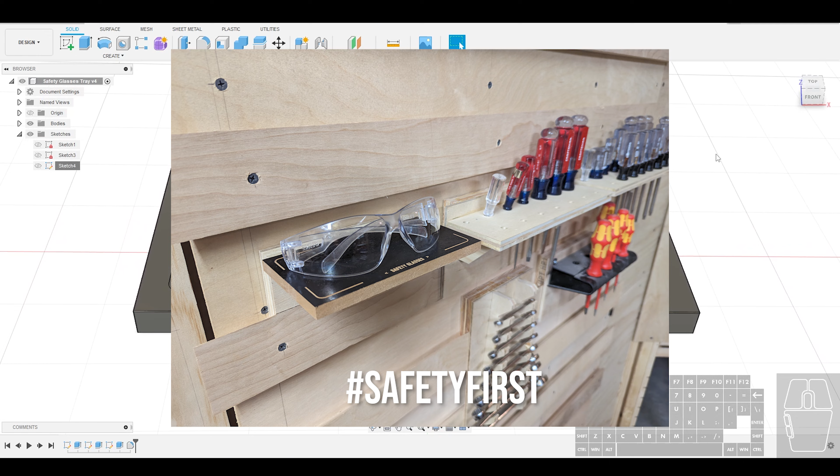All right, so I am going to delete all of this out of my file, and we are going to get started. Walking through the steps, the first thing we need to do when creating a V-carve is setting up our file.

There are two things I want you to pay attention to. Number one is the document settings. I'm going to be working in inches for this particular project, so make sure your document is also set to inches so you can follow along.

The next thing we need to do is set the direction of our primary axes, meaning the direction of our X, Y, and Z axes. Come up here and go to your preferences, and under the general tab, set your default modeling orientation to Z up.

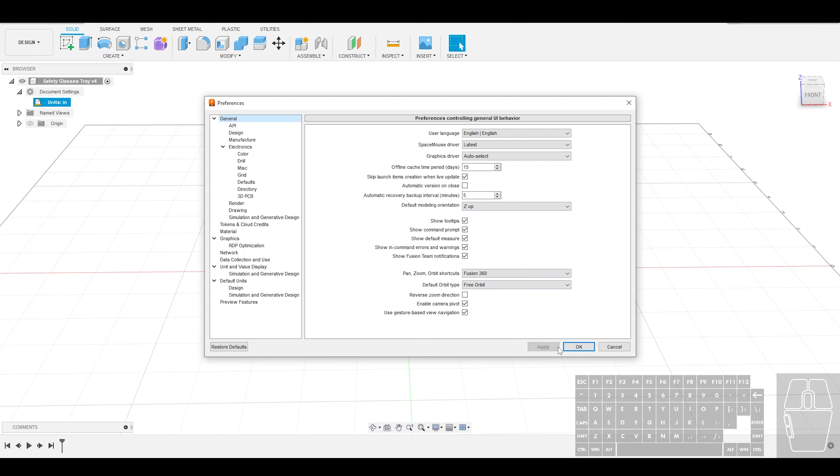That is the way that winners do it.

Now, why do we do that? Number one, I think that's a more common modeling method—if you use Blender or SolidWorks, that's how it's oriented. I also think it makes the most sense for CNCing, because on my CNC machine the Z axis is up and down, and the X and Y axes are forward/back and left/right. So we want to make sure all of that lines up.

Step one complete, document is set up. The next thing we need to do is create a workpiece—essentially the finished dimensions of your final piece, in a rectangle.

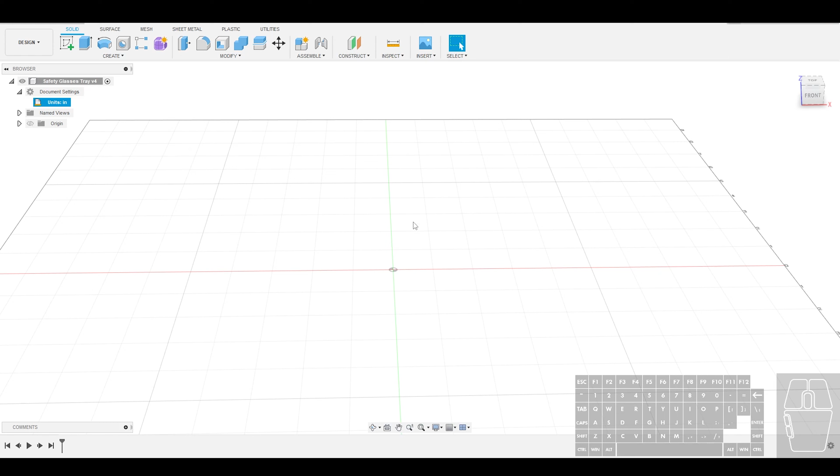So I'm going to create a sketch and put that sketch on the top plane. Next, I'll create that workpiece by making a rectangle. I'll use a center point rectangle and put that center point right on the origin, then drag out. Now I'll define my dimensions very quickly.

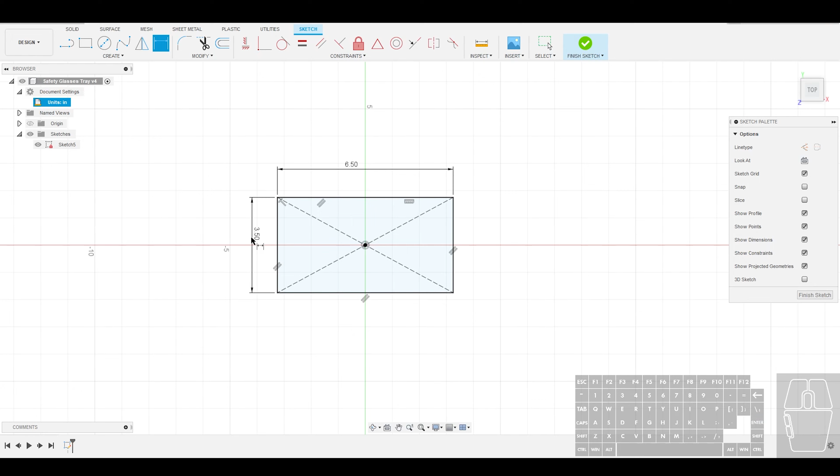For this piece, we are going to use dimensions that are 6.5 inches wide and 3.5 inches tall. One thing I want to make clear is that this bounding box should not be the raw dimensions of your wood, but the finished dimensions of your final piece.

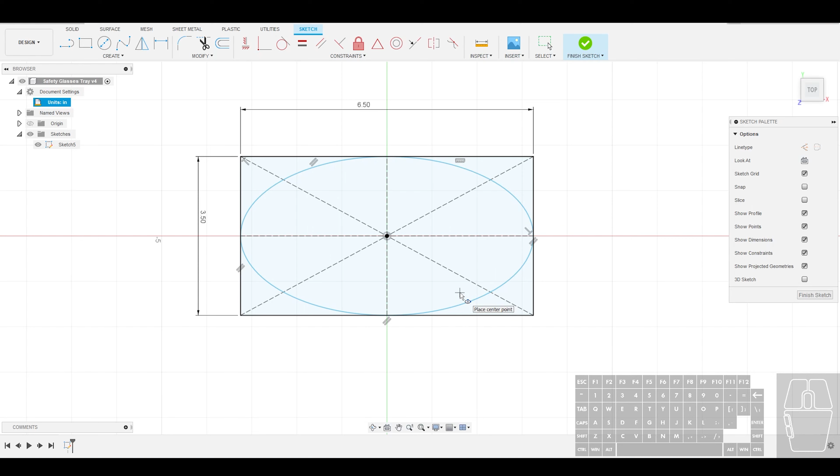Even if you're going to be routing a different shape, for example an ellipse, you're still just going to define this outer bounding box first. I'll undo that really quickly. Okay, great—so always start with that bounding rectangle with its center at the origin point.

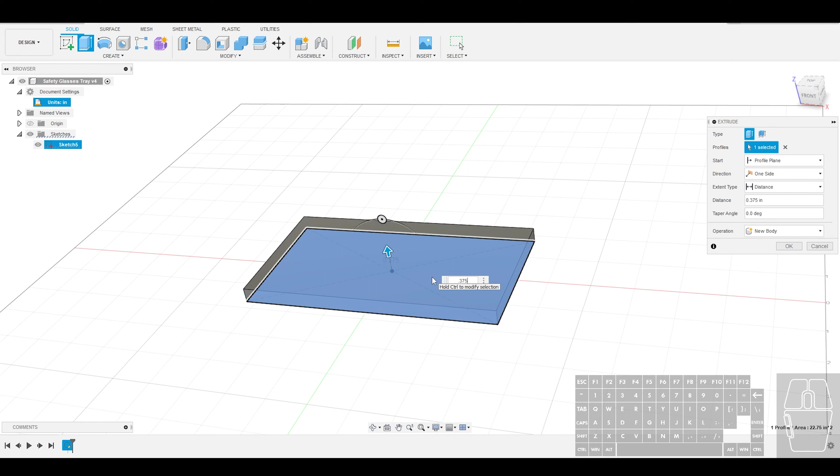Next, I'm going to finish that sketch and extrude it up. A good rule of thumb, especially as you're getting started, is to set that to the thickness of your workpiece. For my example, I'll use a workpiece that's 0.375 inches thick—that's now essentially the block of wood I'm carving.

Step two complete. Next, we need some two-dimensional artwork to actually do our V-carve. We're going to place that artwork on the surface we're going to carve—in our case, that's the top surface of our workpiece.

So I'm going to go in and create a new sketch, and we're going to place that on the top plane. Now we're just going to orient ourselves normal. What we need in order to successfully execute a V-carve, and I'm going to go ahead and turn the bodies off and hide those quickly just to make this easy.

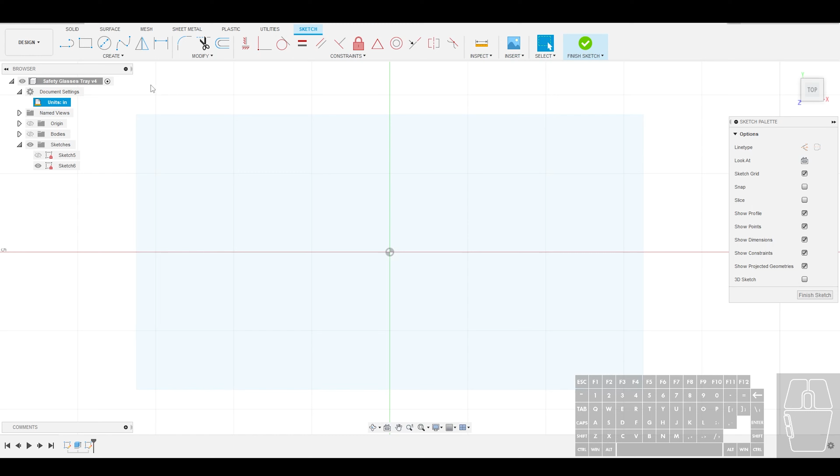What do I mean by that? I'm going to grab the line tool here and just click 3 lines. Now it should be pretty obvious that this is not a closed path, right? There's no volume here, just 3 lines. But if I click and drag this over to create a triangle, now I have a closed volume.

There are 2 ways that you can tell whether your volumes are open and closed right off the bat. Number 1, you'll recognize that you will no longer have the open endpoint handles here once your object is closed. Coincident constrained endpoints that are closed do not show the end handles. The other thing you'll notice is that you will be able to click in that shape and it will be isolated from the rest of the geometry.

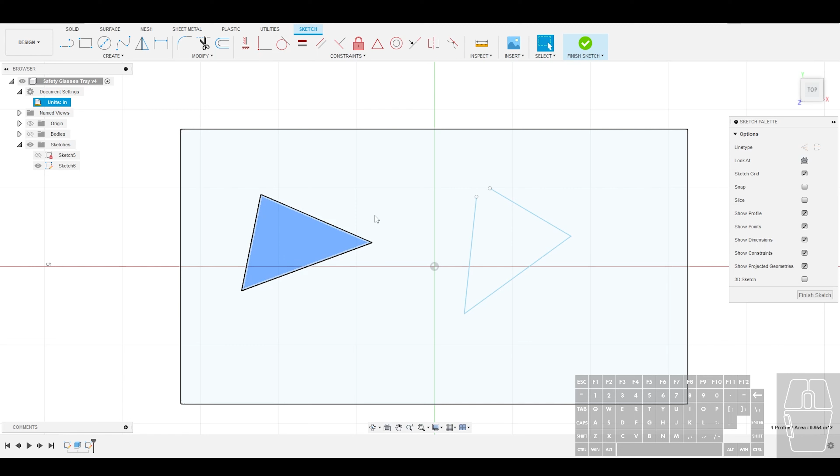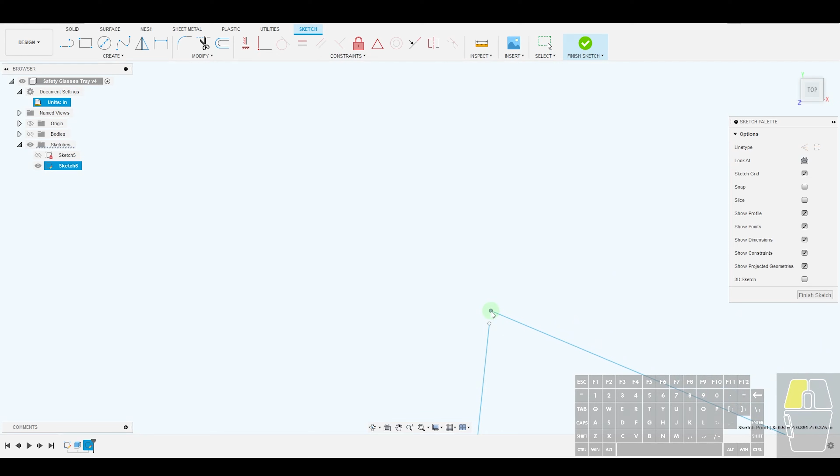Now, in order to V-carve a shape, that geometry needs to be closed. It needs to have an outside and it needs to have an inside. This seems pretty easy as you're starting off with simple shapes, but as things get more complicated and these things get really close together, or if you start importing other geometries, or maybe you just have these constraints turned off, it's going to be a little more difficult to visualize.

So if you ever need to check or find an open endpoint, there's a quick and dirty way to do it, and that is to just create a line and drag it across your object. What you can see now is that I can tell which part is open and which part is closed. I can just continue to drag that around until I can really start to isolate which of these endpoints is the open endpoint. And then as I get closer, now I can zoom in and it becomes much easier to identify.

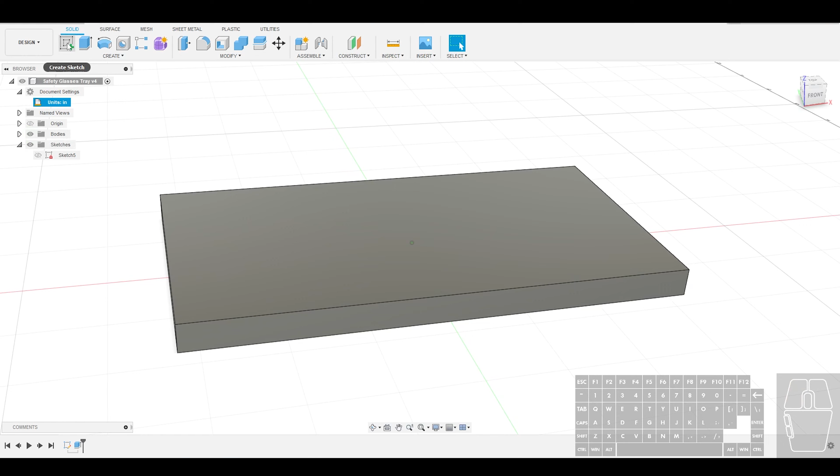I'm going to go ahead and delete this sketch because I don't need that, and start again fresh. So let's go in and create a new sketch. You're going to select the top face, and now let's go ahead and start doing some simple modeling. So what we're going to do is come up here and project these curves so that we can select the 4 endpoints here. And I'm going to hit OK.

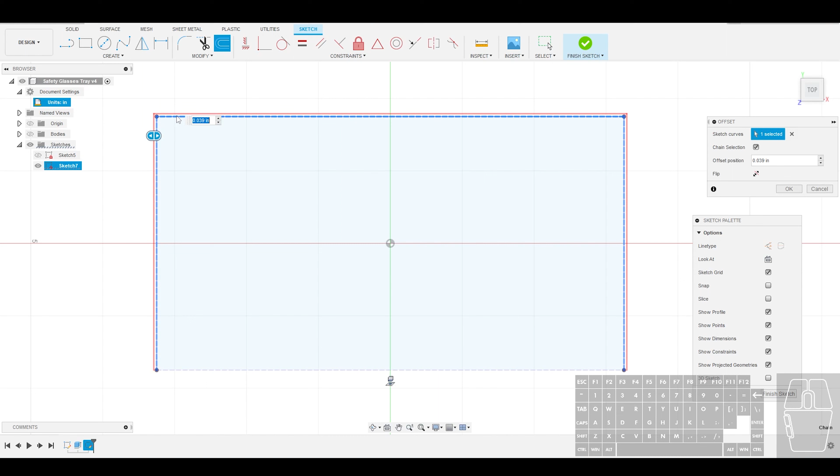I'm going to hide this body, and so now I've got this as my starting box. Now I'm going to go through all of these, select them, and turn them into construction geometry. So now I can come in and I'm going to do an offset from that edge, and I'm going to be offsetting this by, let's say, 0.25 inches. Switch that to a negative.

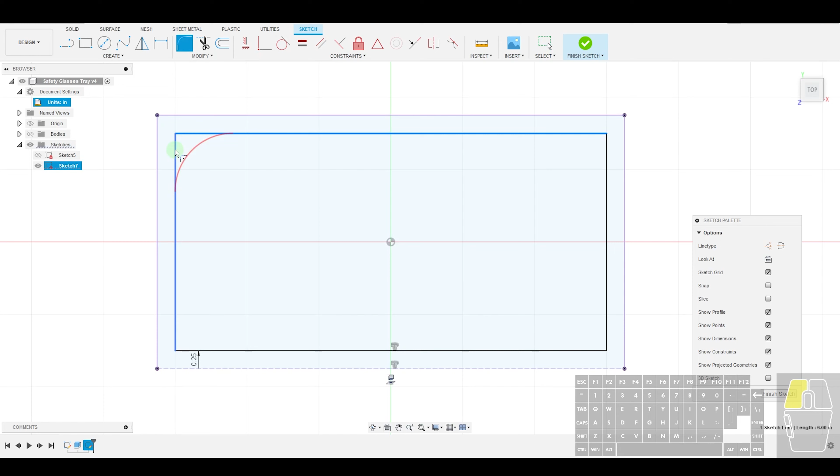So the next thing that I'm going to do is come in and fillet all of these corners, and let's make that fillet 0.2. Now I'm going to offset this entire edge again, and I'm going to do a negative 0.05 offset, just to give it a nice line.

Okay, great. So now I have some closed geometry here. I've got essentially 3 closed loops. So I have a closed loop here that I can use for my V-carving. I'm going to add a little bit more detail to this before I exit the sketch.

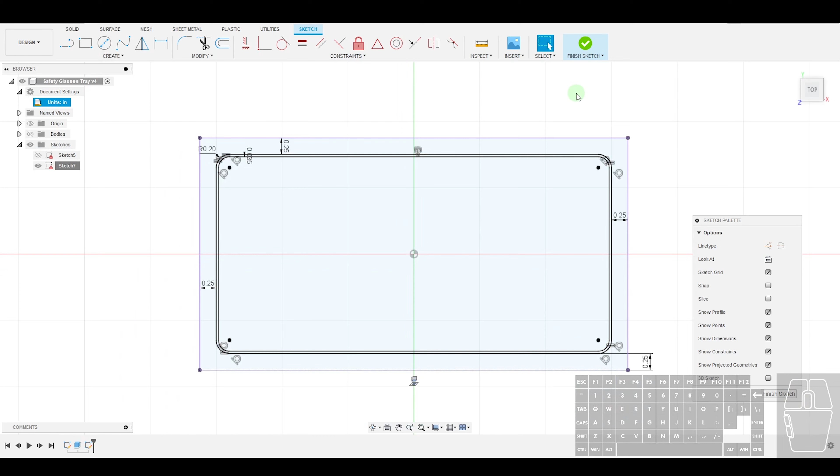So let's go in here. Let's grab a rectangle tool. We are going to do a center point rectangle. Click here. I'm going to go ahead and click up on my bounding box. Then I'm going to do another center point rectangle and stretch it out until it snaps to this edge here.

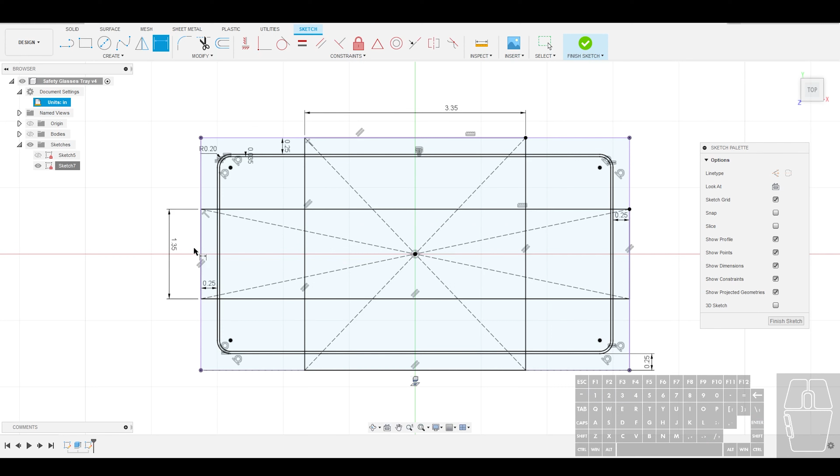All right, and now 3.35, and we'll put this one, grabbing the top and bottom edge, at 1.35 inches, and hit OK. So with all of this defined, I am going to go ahead and finish this sketch.

What I'm going to do is extrude and cut these shapes, dragging this into my main body. The depth doesn't really matter, so I'll hit OK. The reason I did that is because I want to illustrate that Fusion 360 can use both 2D sketch geometry and face pockets in order to create V-carve edges.

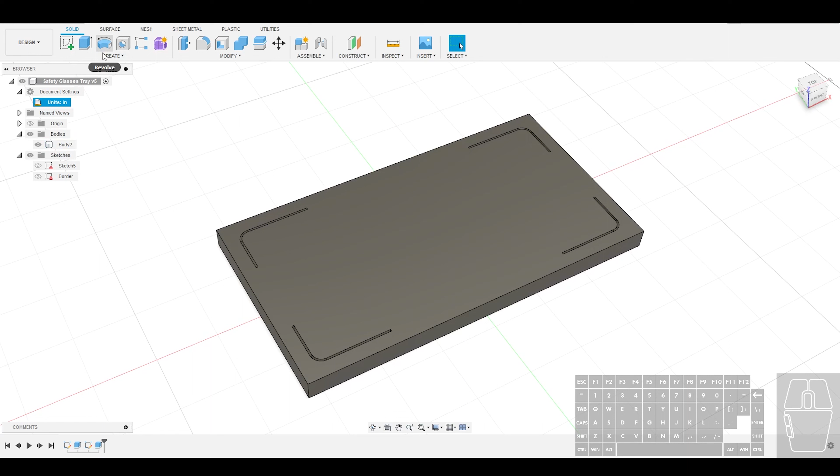Now the next thing I'm going to do is create another sketch, again going to the top geometry. And now I'm going to add some text. So let's grab a quick text box here and place this right about here, and put in some sample text.

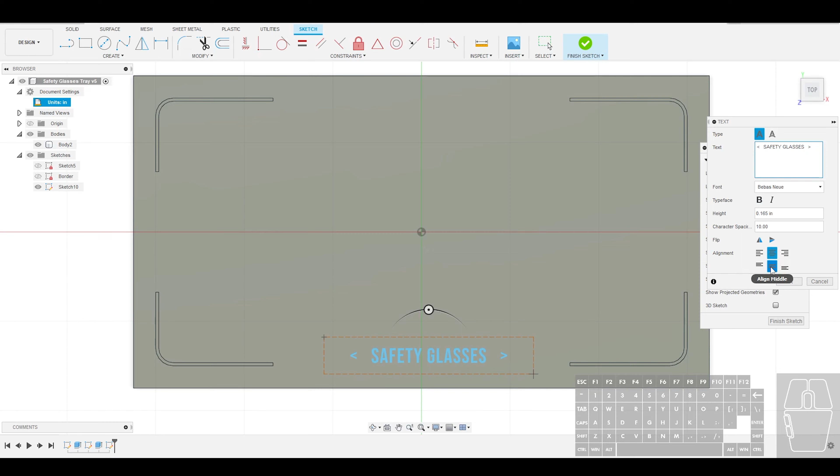A couple of things to call out here: I'm using the Bebas Neue font. If you'd like to follow along, it is a Google font, so you can download it, but this is your file, so you can use whatever font you want. I've set the height to 0.165, and increased the character spacing slightly to 10. I've also aligned this in the center of the vertical and horizontal direction, and then I'm going to hit OK.

Now, in order to line this up correctly, I'm going to create a new line, switch it to construction geometry, and set that up that way. Then I'll set up another one across this way, just so it's very clear where the center point is. Now I'll hit escape to exit that, and I can just click and drag this in order to center up my font.

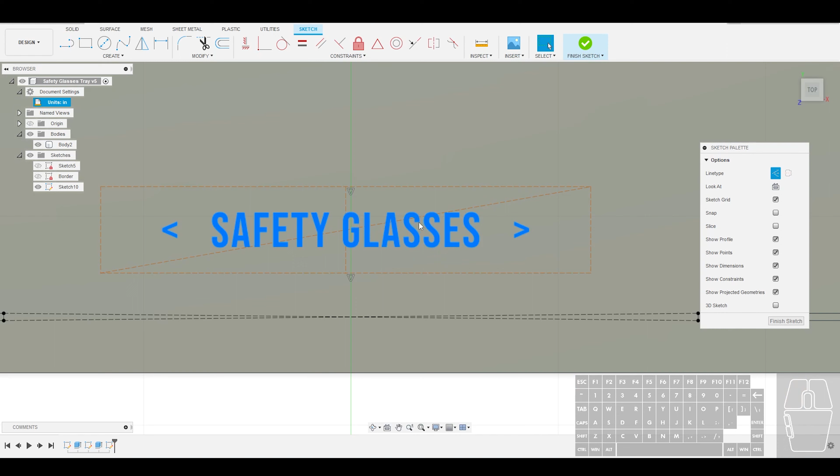Now I can find the center of this box as well, again by using the diagonal method, so I'm just going to strike a diagonal there. You could also use the midpoint. Hit escape, so let's set this up here, and I'm just going to eyeball it—doesn't need to be exactly perfect there. Now I'm going to do finish sketch.

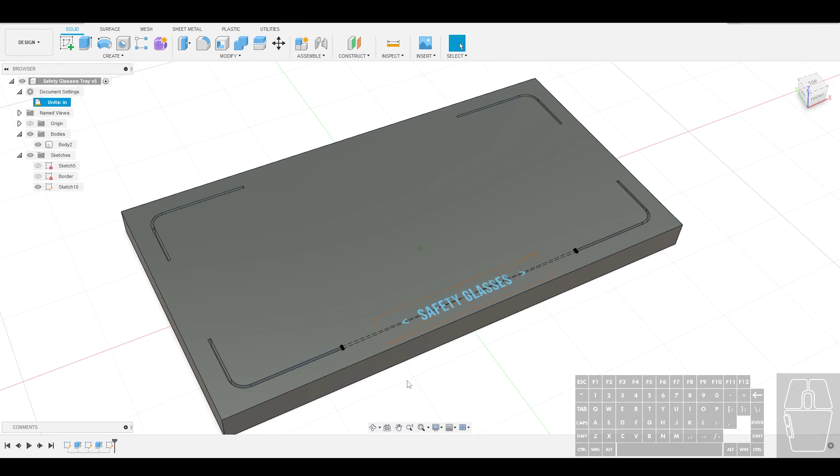As you can see, I have two things driving my V-carve: one is some face pockets and face contours in my actual 3D model, and one is a sketch. I want to reiterate that you do not have to have any actual cuts into your workspace—you could drive a V-carve completely off of sketches. In this case, I just felt it would be easier to run a simple extrude than to go back through and trim all of this geometry to isolate the contours I wanted, so that's why I worked that way.

And with that, we are done with our artwork creation. It is now time to move to our next step, which is to set up our manufacturing file. First, we are going to hit save so we don't lose our work, and now click on the design tab and move over to manufacturing. If you've used Fusion before but have never done any V-carving, this is all going to look very new to you, but don't worry, we are going to walk you through and you'll be just fine.

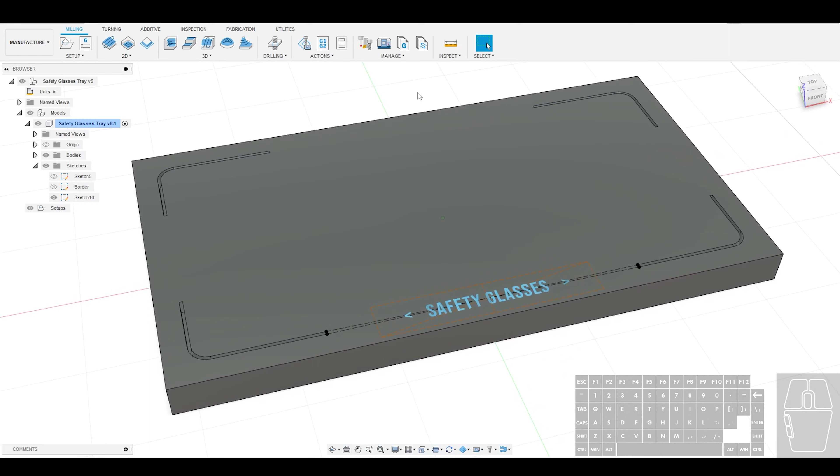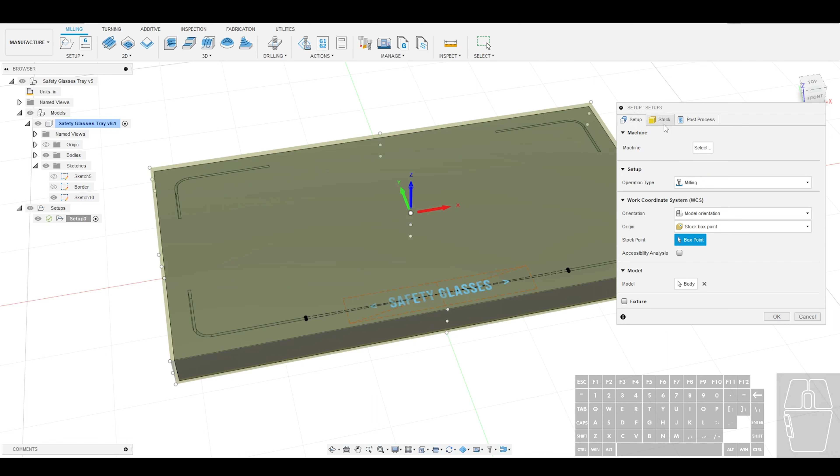The first thing we're going to do once we're in the manufacturing environment is create a setup. Essentially, we need to tell Fusion what are we doing—are we turning, are we milling, are we water jetting? So let's go ahead and create a setup here. The operation type is set to milling, and based off of that it has given us three tabs that we need to walk through.

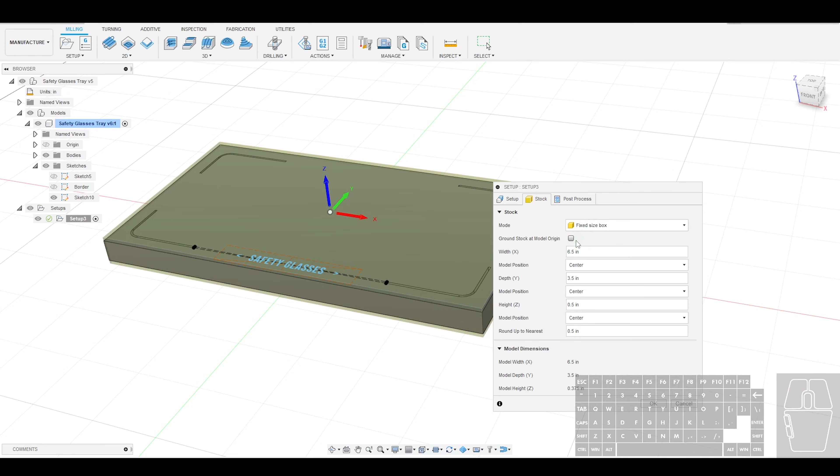I am actually going to start with the stock tab because I want to explain what that is first. Stock is essentially the size of the raw material that you are going to be cutting from in order to get the finished size workpiece. There are really two options when we're talking about CNCing versus maybe more turning. For flat hobbyist CNCing, there's really two types: fixed size box, where you're defining the width, length, and height of the stock manually. So I can, for example, type in 10 here, and you can see now it is going to be stretched out to 10 inches.

The other option is to do a relative size box. That creates the box relative to the size of the model. So for example, if I set the side offset to 2 inches, you can see I now have an offset of 2 inches in every direction, and I can set the top offset to 1. Then you can see in your stock dimensions, this will be the dimensions of that stock box.

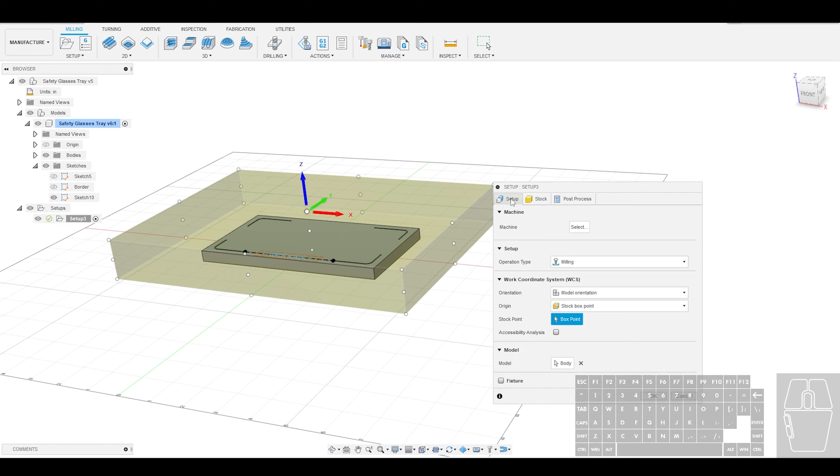We are going to come back to the stock box tab, but let's jump back to our setup. Under setup, there are a few different tabs, or drop downs, that you're going to walk through. First is the machine.

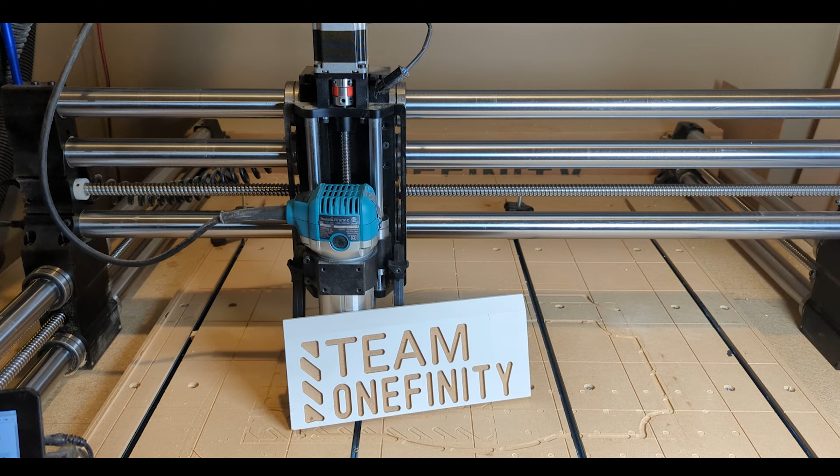Your machine may have some settings already pre-configured in Fusion 360. You can browse through there. I run a Onefinity, and I actually went to their website—they have a Fusion 360 profile that I could download and install—but that is really going to be something very specific to your machine. So I encourage you to do some research there before you start V-carving.

We've already talked about setup, so we can skip through that. Now let's talk about the work coordinate system dropdown. This is very important, so we're going to spend a little bit of time here.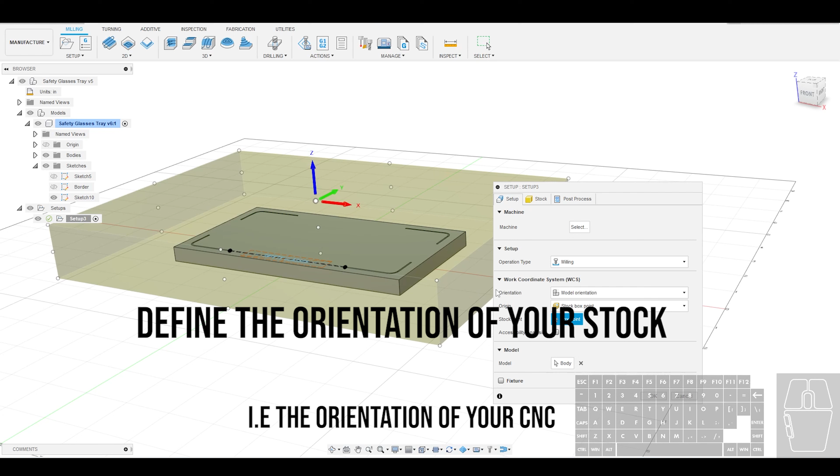First thing you're going to need to do in the work coordinate system is define the orientation of your stock and your CNC machine. Essentially what it's asking is, what does your machine think positive X, positive Y, and positive Z are? The way you do that is go to your machine, set it to jog mode, and push positive X, positive Y, and positive Z, and make sure these three axes are aligned with that.

If they are not, that is how you are going to start CNCing sideways, or you're going to drill into your table. So it's very, very important that you set that up correctly.

Now you can see in this drop-down menu there are a few options. I have mine set to model orientation. We started talking about that when we set up our initial file, right? Z-axis up forever, because for my machine, this is positive X, this is positive Y, and this is positive Z, so that's how I model.

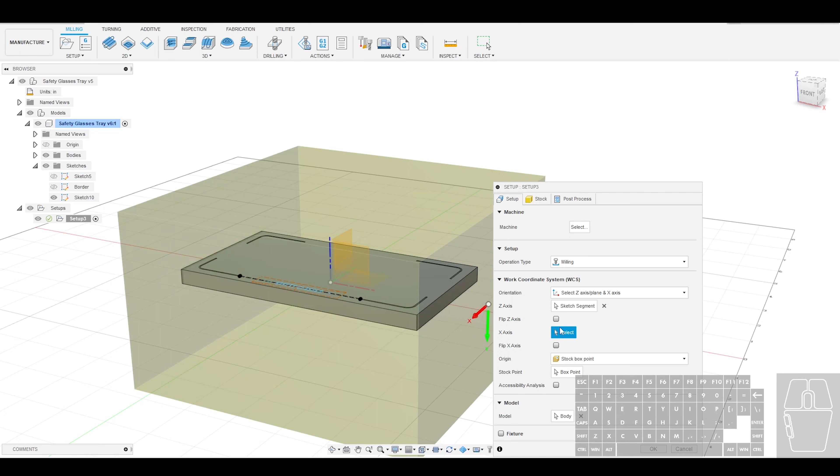You may run into situations where you import a file or need to turn it around so that you're CNCing something in mirror. So you can actually set the X axis and the Z axis independently. If you click on that, you can see now I have the option to set what my Z axis is, and now it's going to ask me to set my X axis. So I set it this way, and now you can see it's set the coordinate system Z, Y, X. Obviously I can change the positive direction by clicking on the tip of the arrow.

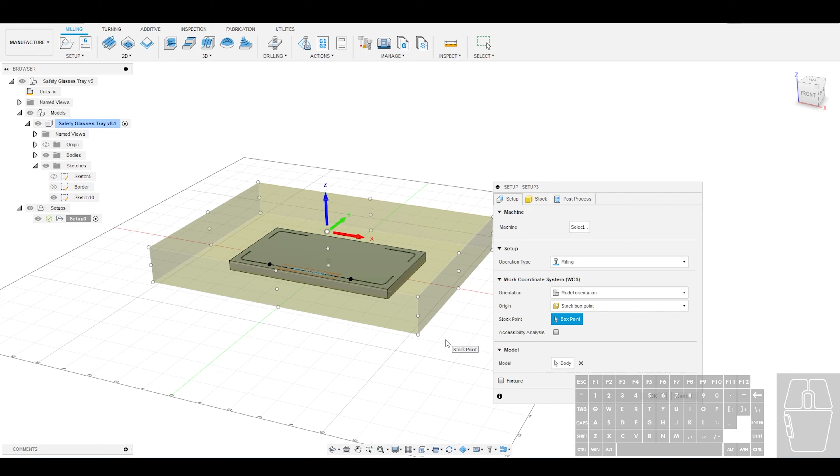Now let's go back to our model orientation—that's what we're going to use here. Once the model orientation is set, the next important parameter you're going to need to set is the location of the origin. What it's asking you here is, what does your machine think 0, 0, 0 is?

There are a few different options right here. You can use the model origin—that's essentially saying, did you model it exactly like it's going to be carved? I don't want to use that.

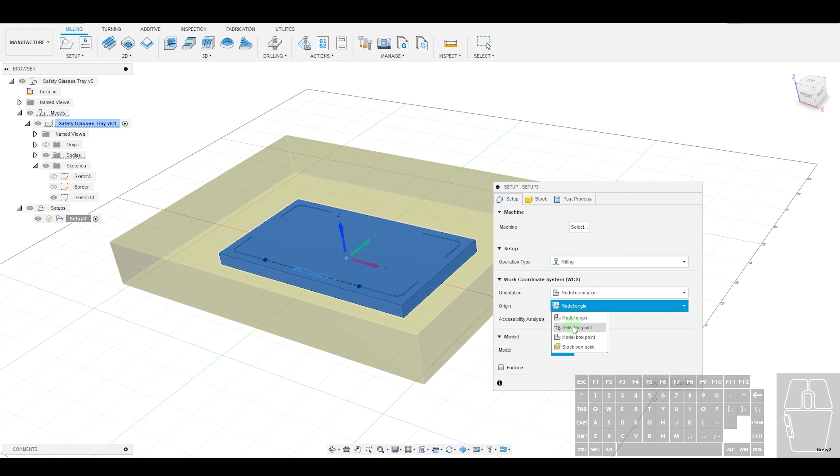Option number 2 is selected point. I can literally select any point as my origin. Options number 3 and 4 are model box point and stock box point. For both of these, essentially what it's asking me is the 8 corners, the midpoints of those lines, and it's also going to show me the center of my faces.

For example, top center, bottom center, middle center of my model, and same thing for the stock box. You can see this is the center of that top box, the bottom of the top stock box, and the middle of the top box—so this is the geometric center of my stock box.

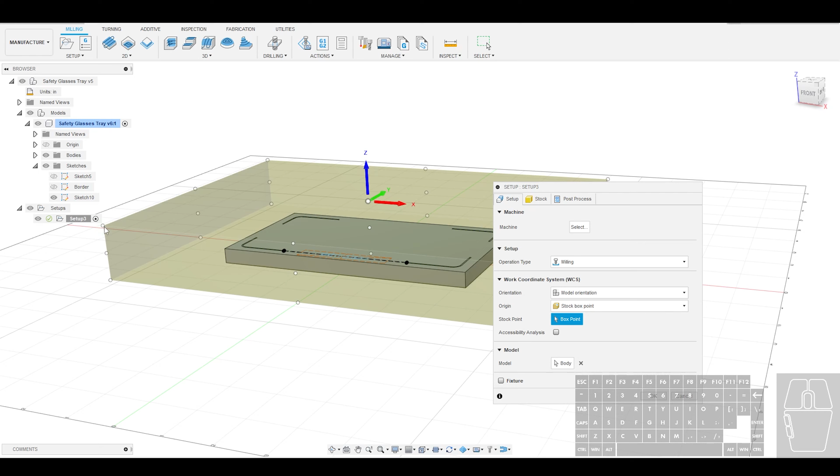A lot of different scenarios are going to require different origin points, but the most common are people using the top center, or one of the corner points to define their zero. For this example, we are going to be using the top center point.

Now, the reason I jumped to the stock tab first is because I want to make you aware of something that can happen and can cause you to ruin your file. I have set this relative size box to be a top offset of 1. That's a pretty uncommon scenario.

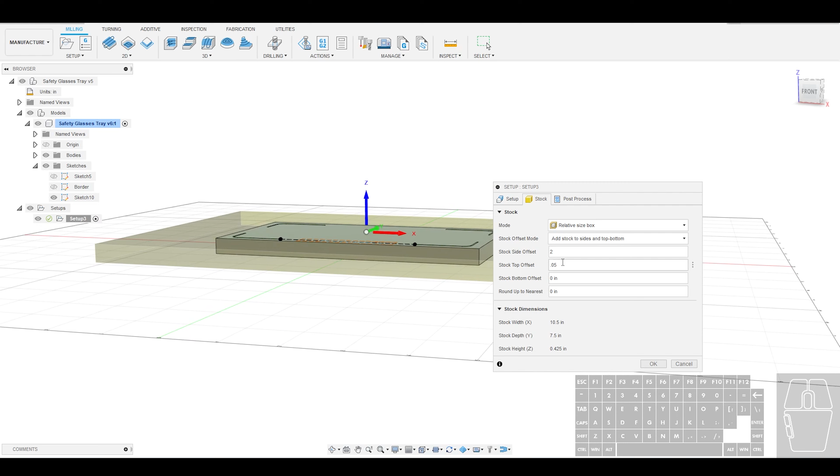What's going to be more likely is that maybe your workpiece is a little bit bigger than your finished piece. Maybe before you do your V-carve, you're going to run some type of face milling operation, so you need to call that out in your stock. If you do that, your stock box point and your model box point are really close together. If you're not paying attention, you can accidentally select the wrong one, and your first CNC pass is going to just destroy the top of your workpiece. So be very careful and always pay attention to what you're setting your origin point to.

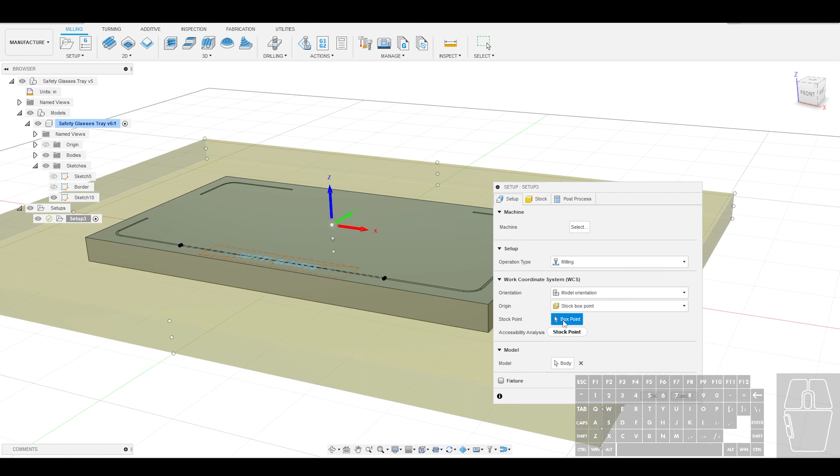Last thing I want to call out on this tab is you can select what the model is. It's not always going to be just one thing. Sometimes when you're modeling more complicated objects, you'll have different things in the same environment that you'll want to carve at different times, so you can define which bodies you want to include when doing this stock box calculation.

Now let's go back to the stock tab. For this example, I'm actually going to use a fixed size box. So what we're going to do is pre-cut the length of our stock board, our raw material.

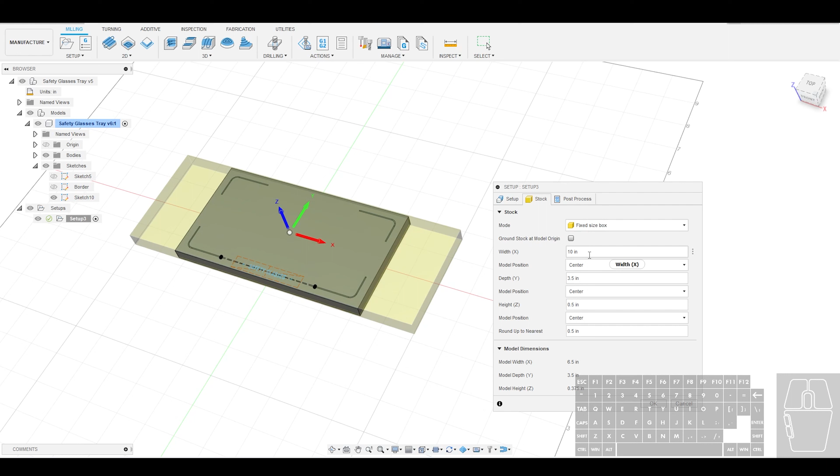I'm going to set the depth to be the same as my finished piece, 3.5 inches. I'm going to set the width to be 10 because I want some overhang on either side so I can place my clamps. Actually, let's bump that up to 12, just for a little additional safety here.

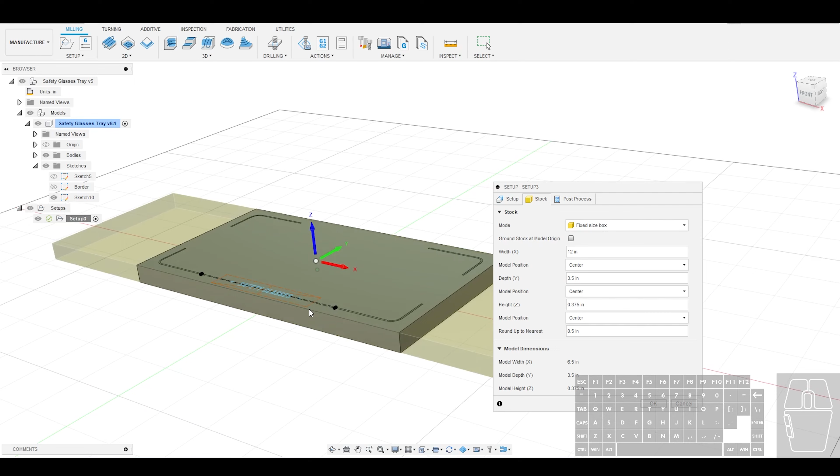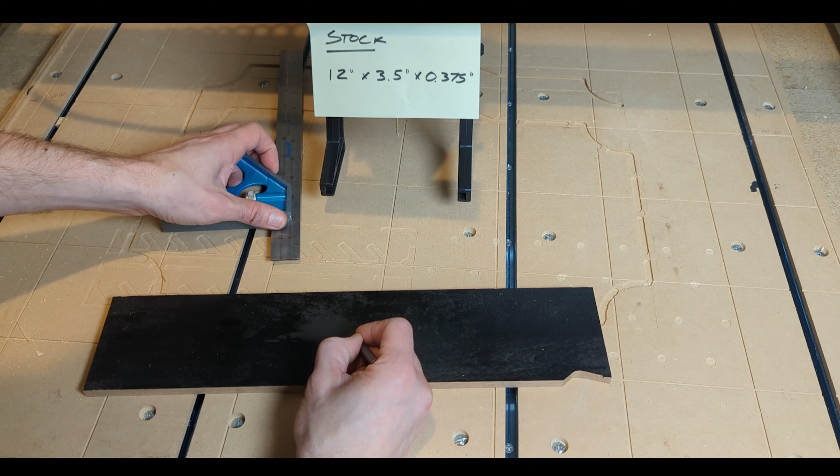I'm going to set the height to be the exact same as my workpiece, 0.375. The reason I did this is because for this particular example, I want the zero point of the origin, 0x, 0y, 0z, to be the center top of my stock, which also coincides with the center top of my finished workpiece. And then we'll hit OK.

All right, setup is complete. Now, one last thing I want to call out before we move to the next step is that you can right click on this anytime and edit it. Then when you make your changes, you can just simply hit OK.

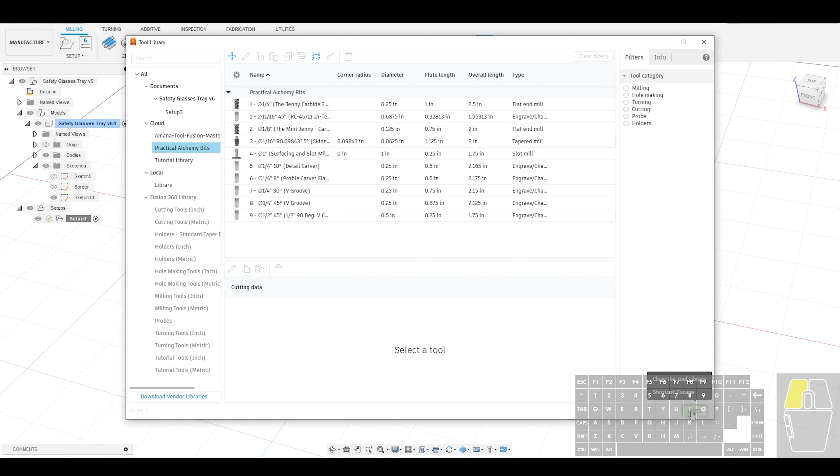Next step in our VCarve process is to import your tools into your tool library. If you have not done so, I actually have a separate tutorial dedicated to how to install your bits. You can find that video here. If you have not done so, I highly encourage you to pause this video, jump over, and then jump back. So for this tutorial, I'm going to be using this bit right here.

I think it's great, I love this bit. Not super expensive, and I love the fact that I can change the blades out. But for this tutorial, I think pretty much any VCarve bit will do. So jumping back over.

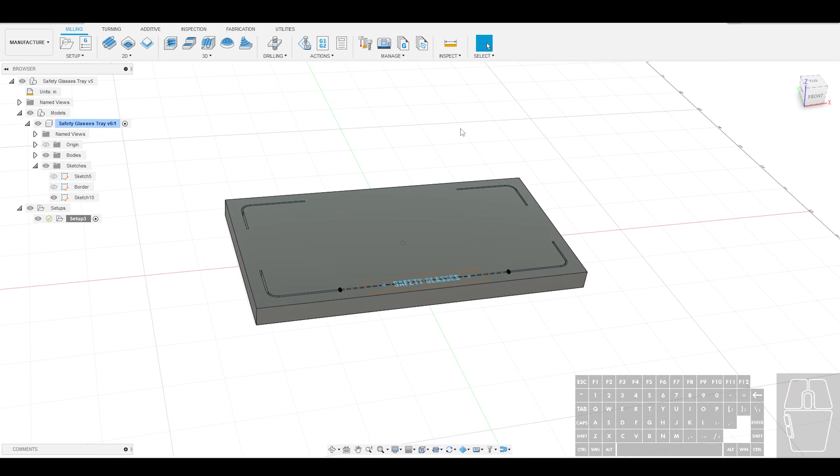Now that we've got our tool imported, the next step is to start defining our toolpaths. All of these options here are different toolpaths. We are going to be doing a VCarve today, so the toolpath we'll use is the engrave option. Once you click on engrave, you'll see a very similar dialog box to what you saw in your setup.

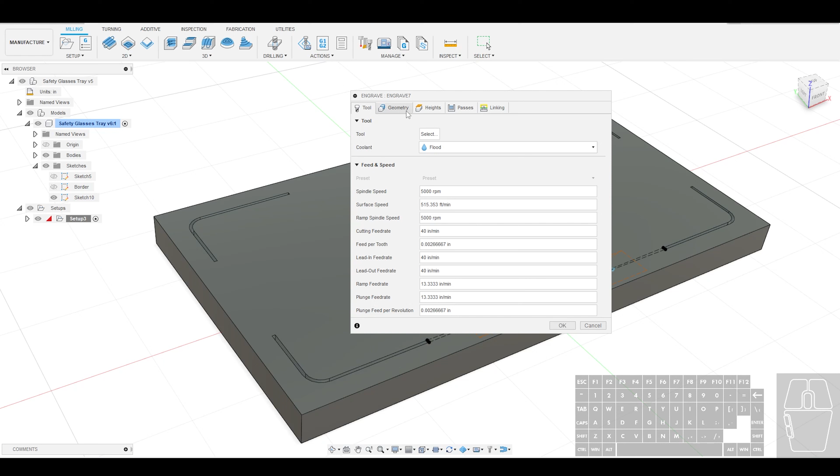All right, so I'm going to walk you through this. First option here is to select the tool from your tool library. I'm going to go to the Practical Alchemy bits, select the Amana bit that I just mentioned, and hit select.

What you can see is it's going to ask you a lot of different things. Now I actually have some default settings in my tool. So let me open the tool library again, double click on that, and then double click on this bit.

You can see on the cutting data, I have some settings preset to things I use often. What I can do is come in here and from this drop-down menu, I'll just set my standard V-Carve.

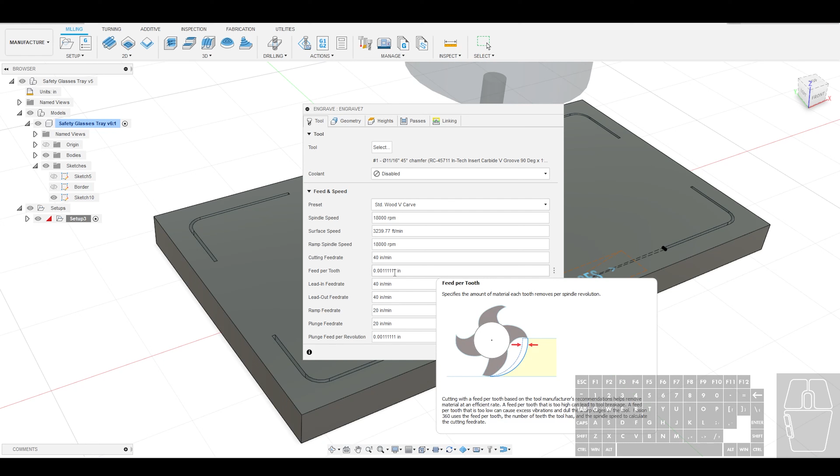The next question you're probably asking is, where do I get this information? The best answer is to always go to the original manufacturer's website. Oftentimes they will provide the feeds and speeds, which you can download. When I click on this PDF, I can identify the bit, identify the material, and it's going to tell me the key components: the RPMs, how fast it's going to spin around, the feed rate, how fast it's going to push through the material.

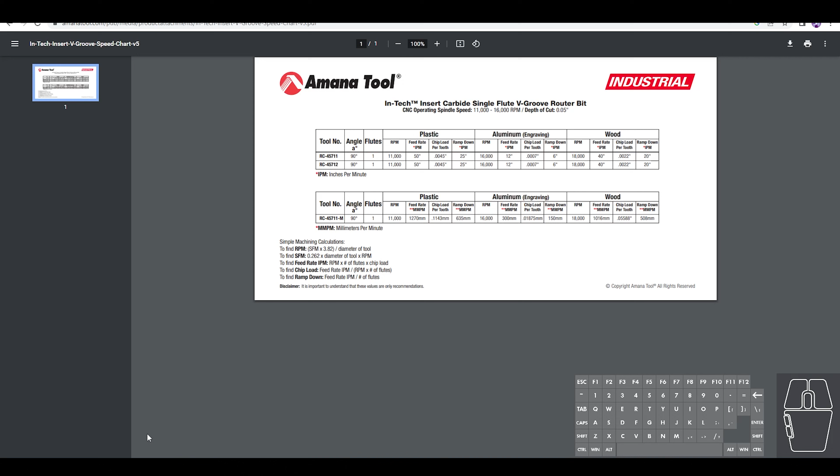Some of the other parameters you can calculate based off of that. So jumping back into Fusion, you can see I've got my cutting feed rate set to 40 inches per minute, my ramp feed rate set to 20 inches per minute, and the plunge also set to 20 inches per minute.

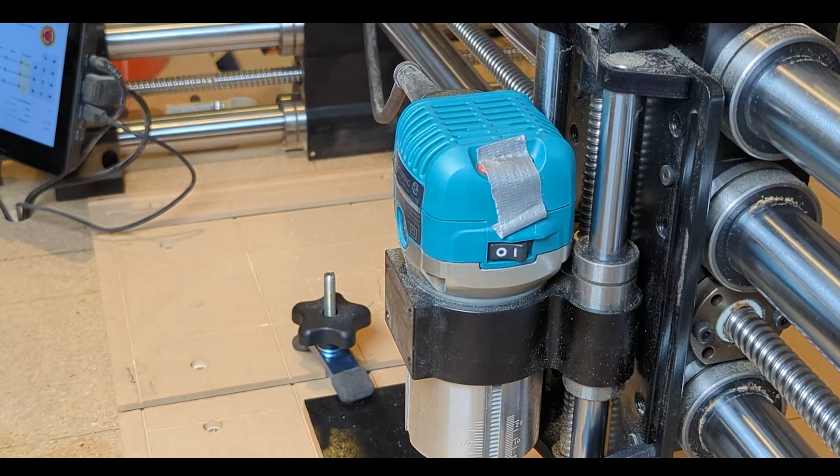Very important thing to call out when setting your toolpaths is to pay attention to your spindle speed. I'm running a Onefinity hobbyist CNC machine with a Makita router, so my CNC machine does not control the speed of the router. No matter what you put into this box, could be 1, could be a million, it does not affect that speed. So be aware that before you start your carve, you want to make sure you've set your spindle speed correctly, manually, for that path.

Still, I like to get into the habit of making sure I've got that data entered so that when I go downstairs, I'm not always having to remember or go back to the website. I can pull up the toolpath and see what the spindle speed should be set to.

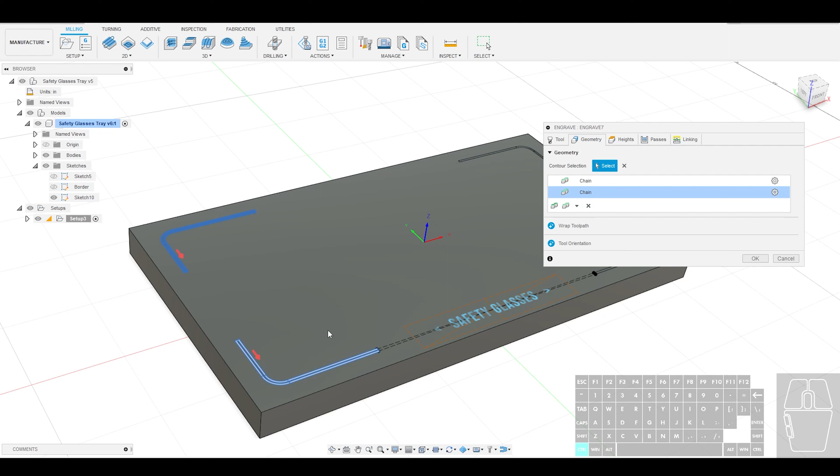With all that, the next thing is the geometry. What are we gonna cut? You can see there's a contour selection here, and I'm going to start clicking all of the closed contours I want to include in my toolpath. They'll be added to the list as chains. If you accidentally click on something you didn't want, just click it again and it removes it from the list. Then when you're done, move over to the Heights tab.

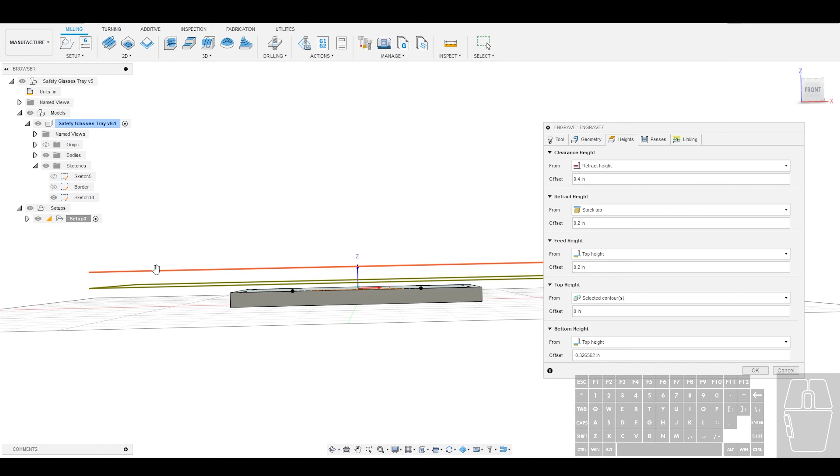The Heights tab is important because it sets up where the machine will set the height when it's moving around. You can hover over all of these and read about what they do, but I'll give a quick breakdown. Clearance height is how high the CNC machine moves when going from path to path. Retract height is how high it goes when going from contour to contour.

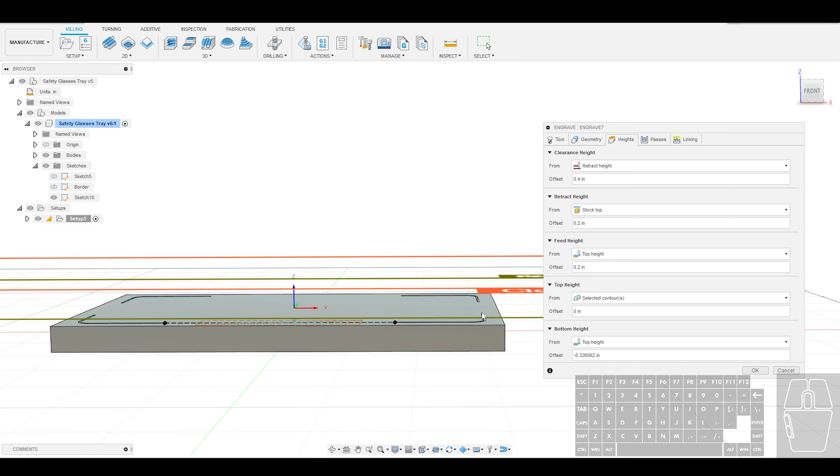Feed height is essentially where it transitions from its rapid to its plunge speed, going from rapid to slowing down so it doesn't slam into the material too quickly. Top height is the top, and bottom height is the bottom of the toolpath.

As a general rule, if you're doing a simple 2.5D V-carve on a flat surface, the default options here are going to work out just fine.

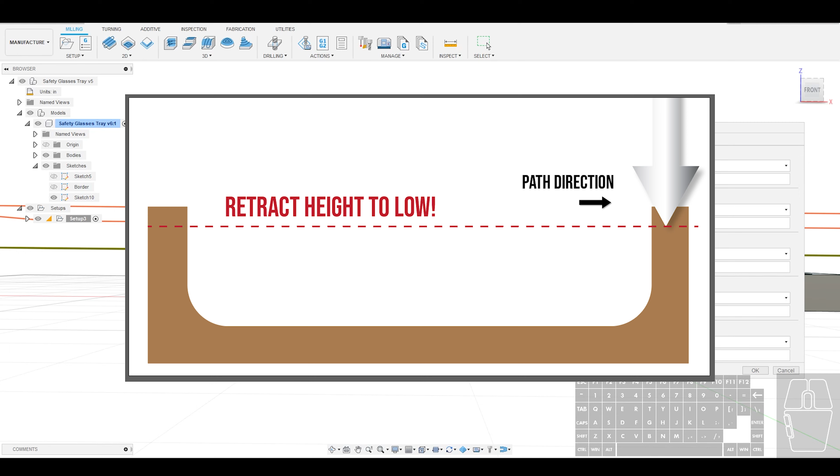There are two major scenarios where you want to pay a lot of attention to this. Number one is if you're V-carving down in a pocket where you've got a lot happening above, you want to make sure your retract height and clearance height are high enough that your tool isn't accidentally slamming into, say, the edge of a bowl. If you're V-carving down in the bottom of a bowl, make sure the retract height is high enough that it won't chip off the edges.

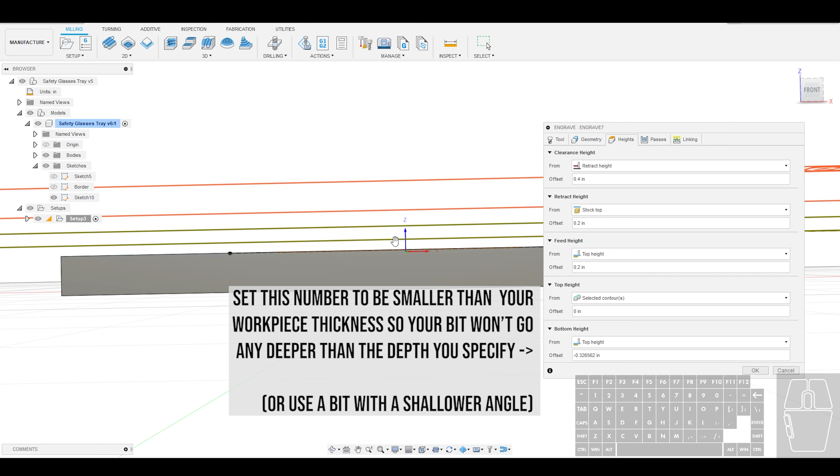The other scenario is if your V-carve path would allow you to essentially carve through the bottom of your material, you're going to manually set the bottom so that it will not go past that point.

And if that's still confusing, you can jump over to my beginner's guide to V-carving video where I explain that in greater depth. All right, now let's go to passes.

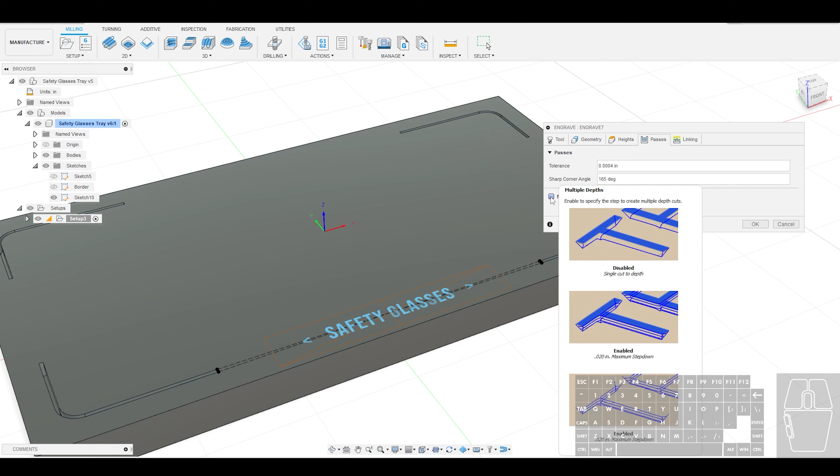So for V-carving, really the options here are, how sharp do you want to take these corners? I've never changed the setting. The other option here is to engage multiple depths, so will you do all of your V-carving in a single pass, or is it going to step down incrementally, which can be good for bigger pieces to help from chipping. But for now, we are going to leave that toggle off.

And the linking tab is not really going to matter for this, although you can set the entry position manually if you need to - essentially, where is it going to start your tool path? All right, and with all of that set up, we are going to hit OK.

Toolpath setup complete. Next step is to simulate, and this is very, very important. You should always, always, always simulate your toolpaths before you export them.

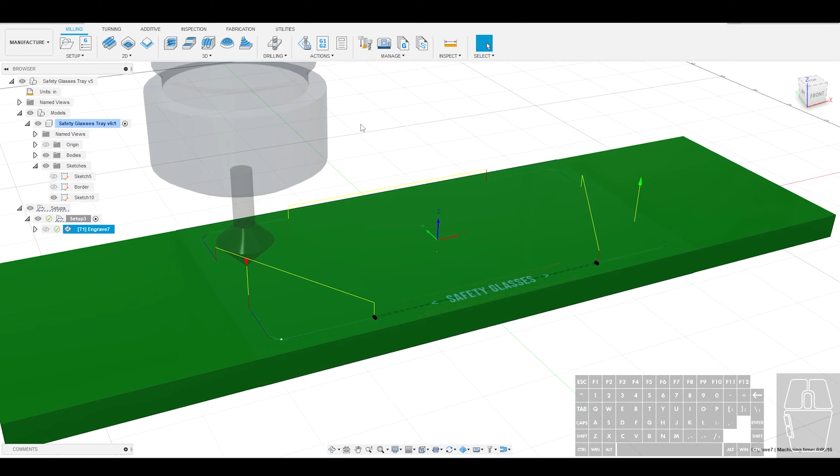What we're going to do now is turn off the model because we don't want to see it for the moment. And we're going to go over to simulate machine. Now you can see here there are a few different options. I feel like I typically leave all of these on by default.

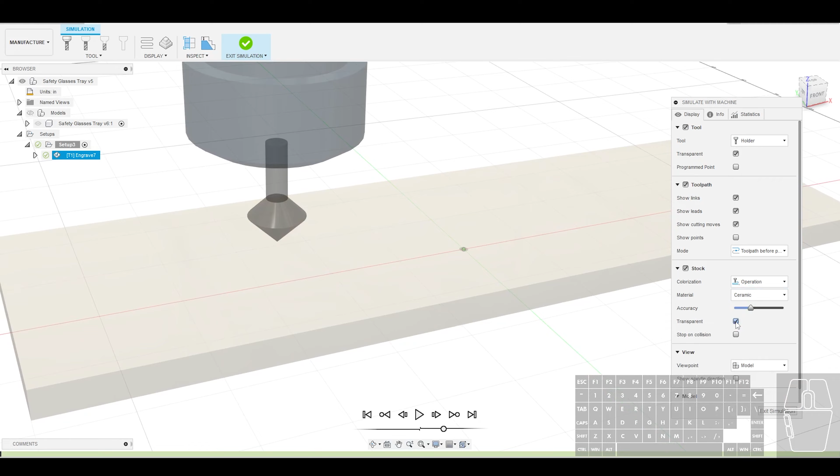And the question here is really, what is the stock and do you want it to be transparent? You can change the stock if you want it to be more metallic or more like wood. Right now we'll just use the default ceramic. You can set its transparency here so that you can actually see the tool going through the side of the workpiece. And we also have the dialog down here in the bottom center.

So what we're going to do is push play and we're going to watch the simulation to make sure that everything is moving exactly as we intended.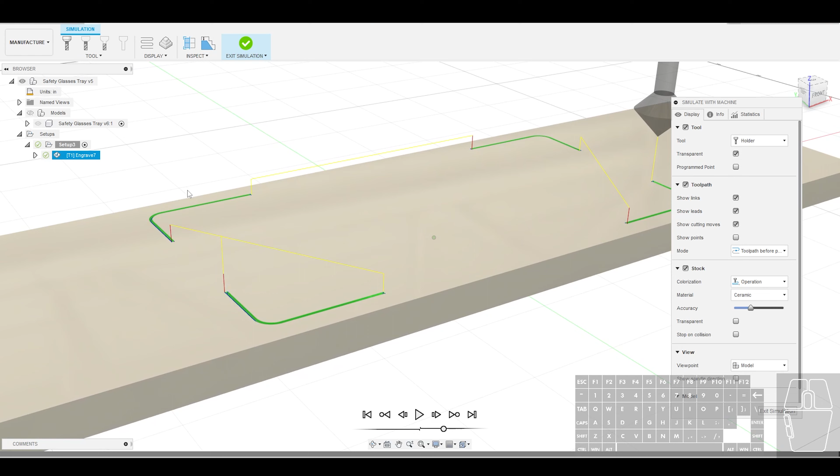So there's a few different things that you are going to see here. The yellow line is where it's going to rapid, so that's where it's going to be moving very quickly. The red is when it's going to transition to its ramp speed, and then the blue lines are the actual cutting through the workpiece. And then you can see the green is the area that's cut away.

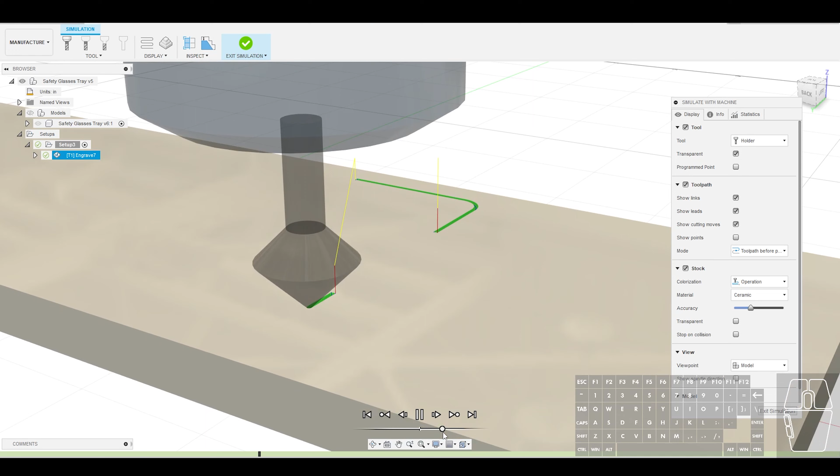So I'm going to slow this down and we're going to run this again. Let's hit play. All right, and as you can see, where the tool is going to be rapiding down. And then as it starts to get closer to the workpiece, it's going to slow down a little bit. And now it's going to start our V-carve. I think we got the idea, I'm going to speed it up a little bit. It's going to rapid over, and get all of our paths.

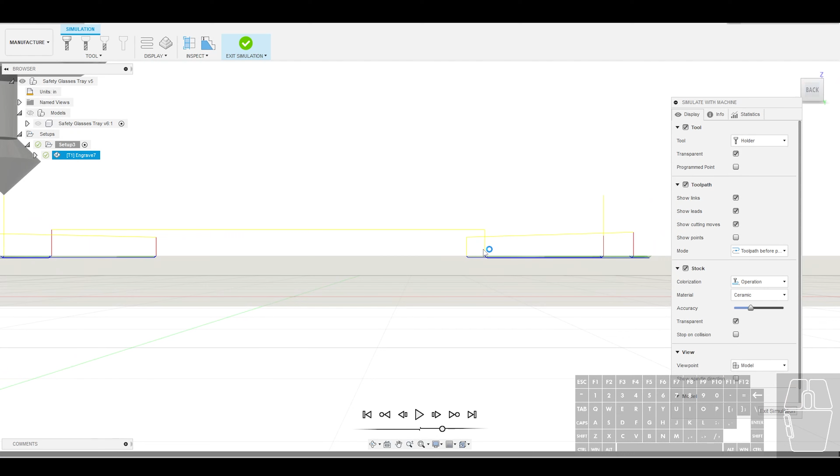Now, the other thing that we're going to be checking for here when we're doing our simulation, one, to make sure that it's doing what we expect it to do. But the other thing we're checking is that our machine is not going through the bottom of our workpiece. Essentially, the wider the path, the deeper the bit goes, so we just want to make sure that at no point is our bit going to be plunging through the bottom of our workpiece. Now, this is a very small V-carve, so we don't have to worry about it. But again, it is always important to run a simulation, check your toolpaths, and if you have any issues, right-click and edit those toolpaths.

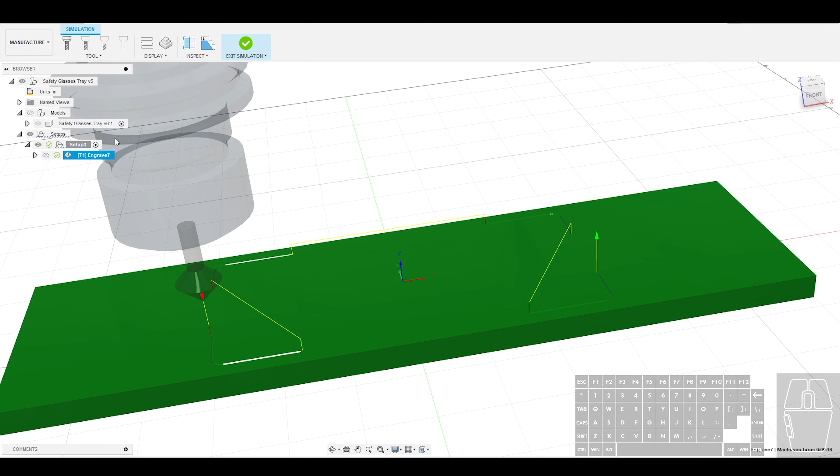So I just showed you how to create a V-carve toolpath from a face contour. Let's do the same thing from a sketch. For example, let's turn our model back on for a second. We're going to go back up to 2D contour.

We're gonna hit engrave again. By default, it's gonna select the same bit that I selected last time.

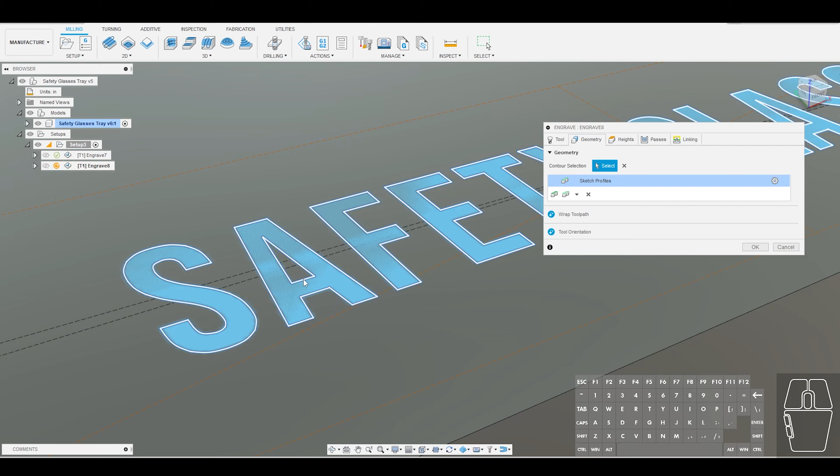All right, I'm gonna do my contours and I am going to select this text. The cool thing is that if it is still text, it will select it all in one thing. If it's not text, and it's just geometry that you've imported from a DXF file, you are going to have to select each of these individually. In order to create the interior and exterior of the A, you need two closed paths: a closed outer path and a closed inner path. It's smart enough to know what to do there. So with all of that, I don't need to change any of their settings, so I'm gonna hit OK.

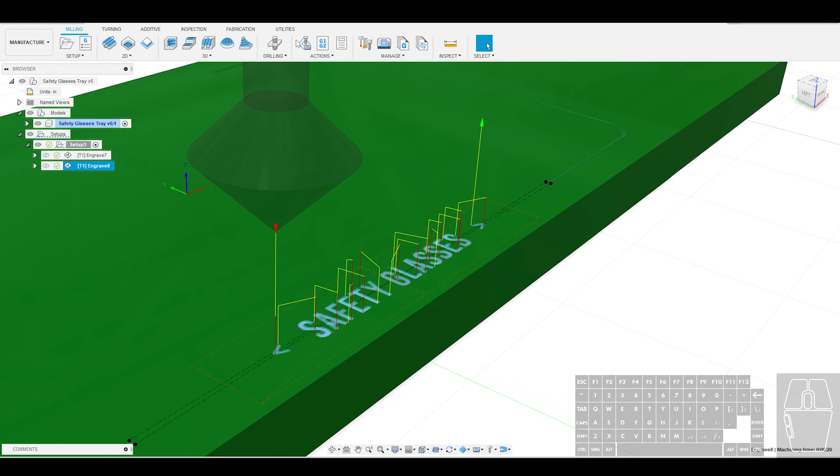Next step is to simulate. I'm gonna go over to the simulate path, still generating. I'm gonna turn that model off so that it's not occluding. As you can see, when I hit simulate here, I'm gonna hit play, and it's gonna come in. Oh, you can still see the model. Turn the transparency off. All right, that was a little choppy. Let's run that one more time. All right, so I check my simulation here.

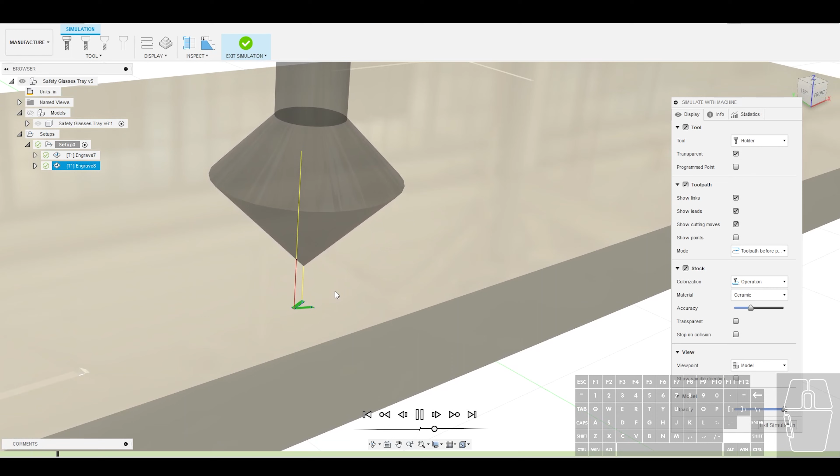It's gonna come down, start cutting these edges. Let's speed it up a little bit, and transition into the side view here. Transparency on so I can check. And everything is looking good to go.

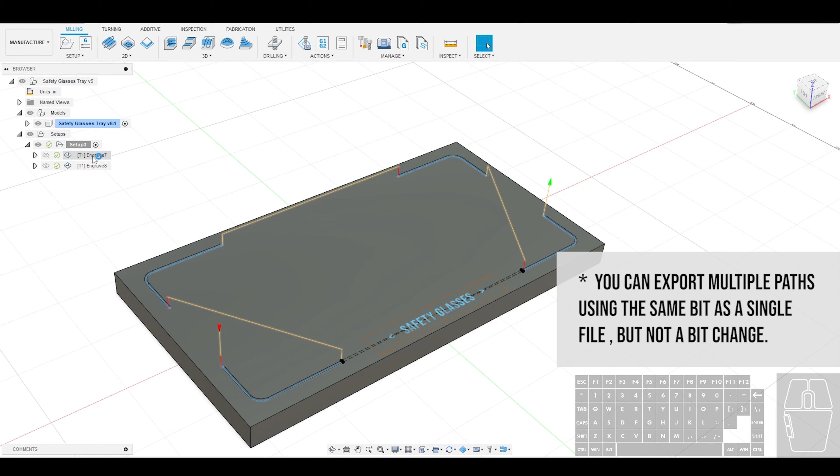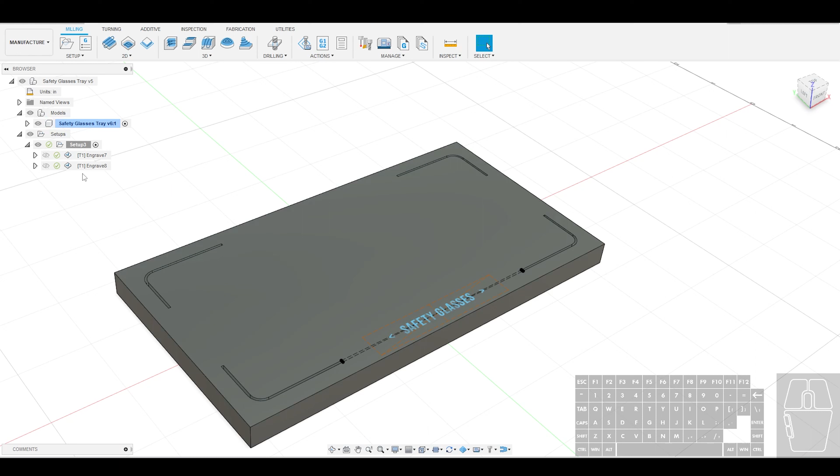That can be a hassle. If you've got lots of little things, I would not recommend creating 18 different engraves. But at the same time, if you have something very complicated, it can be very hard to click on everything and make it all processed as part of one path. So, trade-offs. For this example, while I could have selected all of these contours as part of a single engrave path, I wanted to set it up as two specifically so that I could show you what to do.

So the first thing I'm gonna do is click on this toolpath, and then come up here to post-process. Click on that, and it's gonna give you some options. It's gonna tell me where to export, this is my jump drive. It is going to suggest a name, but I'm just going to go in here. Typically what I like to do is call this something big, like safety glasses, and then give it a numerical code like 01. That way I know this is the carve I want to run first, and then that's the file I want to run second.

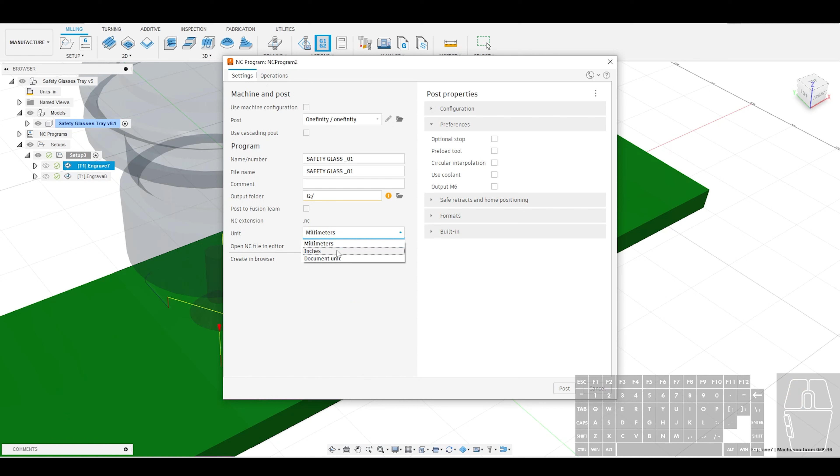All right, there are some other options here in terms of configuration. I don't touch any of these for my specific CNC machine. I know some people have to select things like outputting the M6, or opening the NC file editor after it posts so that you can add stops and things like that. The only one I would call out is to change the units if you prefer metric or SAE. Here, I'm just gonna use the document units, that's fine, and we're gonna hit post.

Once it has posted, you'll get a little pop-up down here, and I'm gonna do the same thing with it. I'm gonna select it, hit post process, and label it safety glasses 2. That way I know this is the one I'm gonna run second, and hit post to export. All right, and with all of that, we are done working in Fusion 360.

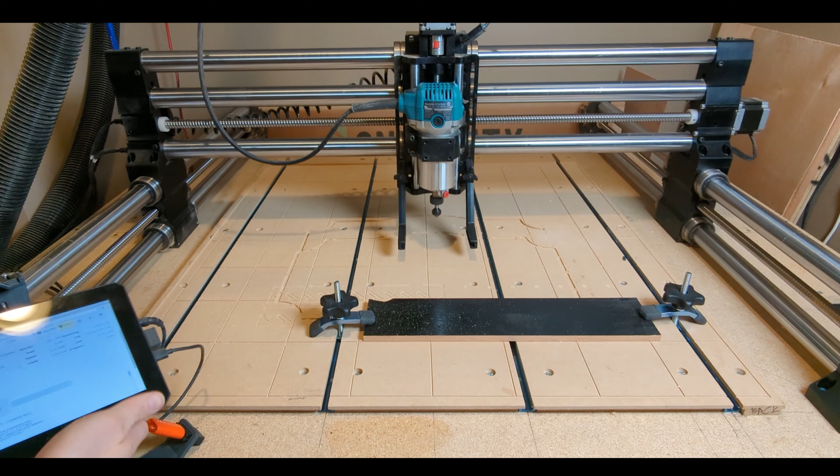So you can grab your jump drive and head down to the CNC machine, and I am gonna be walking you through that entire vCarve process in the next video.